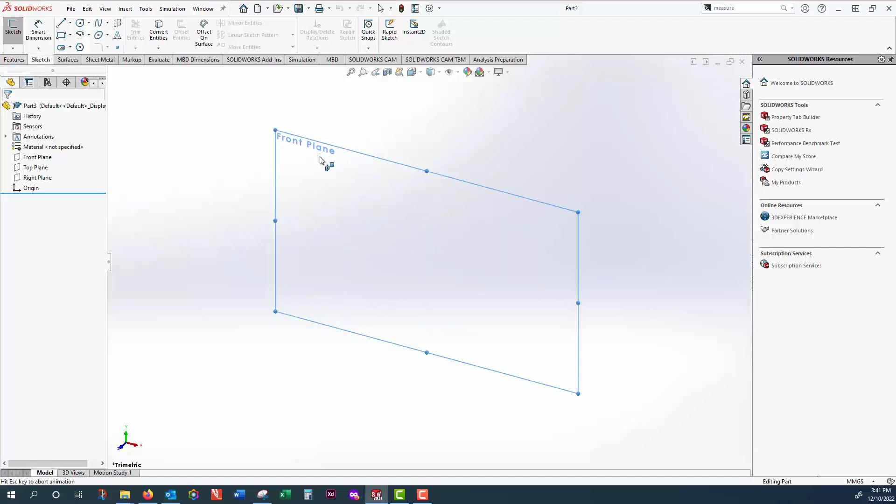In the last video, I showed you how you can utilize an image of a drawing. So we do the same technique here. That's very useful when you want to do reverse engineering. You have a picture which has dimensions on it, so we do a sketch first. From the sketch tools menu, you find the sketch picture option, and what you need is a JPEG or bitmap of the picture you want to use for measurements.

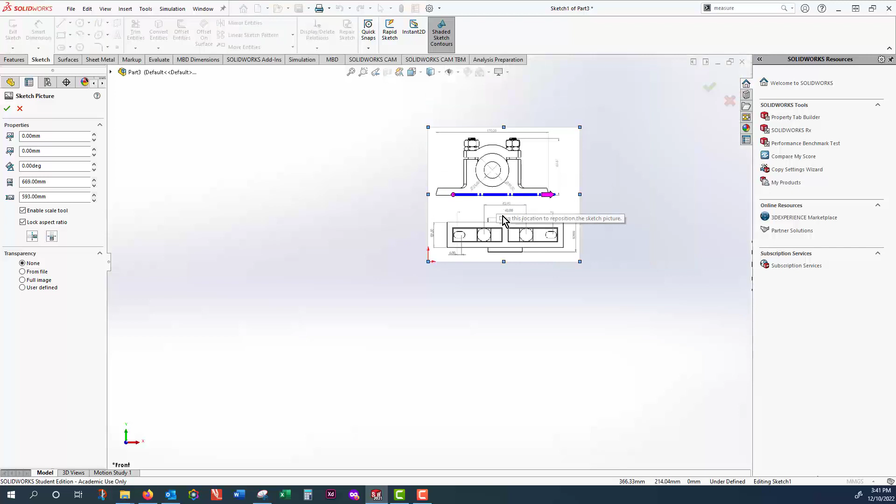In this case, we have the calibration arrow. You have to bring the beginning at the beginning of the largest dimension. The reason I said largest dimension is to minimize the error. Basically, you can do this with any dimension. So here, that is 170. Now my picture is calibrated, and from this point forward I can do direct measuring from this picture. Of course, it has some errors in it.

So let's remind ourselves how this shape looks. It is an upper block. It has a cylindrical face inside. Both outer sides are flat, and then these ears have the cylindrical faces, and there is a cutout to allow the bolts to sit there properly. Let's also remember there is a hole which helps to oil the bearing.

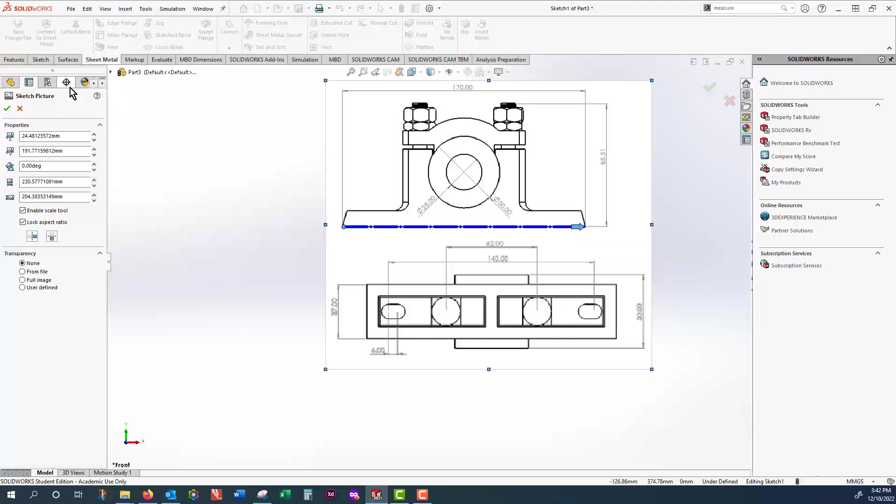So we remember all these features, and the strategy I'm going to use for drawing is to draw over this. To start that, let's finish the sketch tool, and then I need a center line, and the center line could be here — that is the axis of symmetry. Of course, I make only half of the part, and the rest is mirrored. So from this center I draw a circle.

That is pretty much it, and now I remember that the cylindrical part of the journal bearing had a diameter of 62 millimeters. So here I need a circle of 31, half of that diameter. That is the cylindrical part of the upper. And then let's remember that this one comes down with the two flat faces.

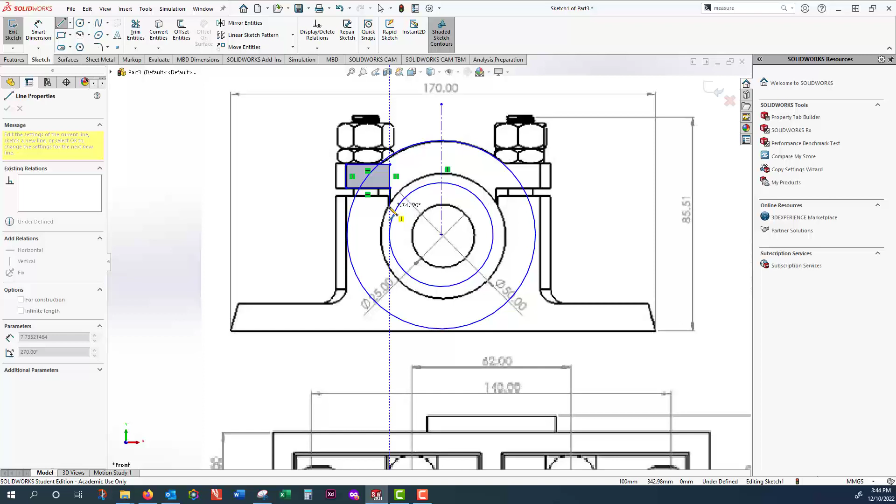Okay, so that means I need to make a rectangle from here to there. And then a little line to bring this up to, I think, up to somewhere like that, where it intersects the step inside.

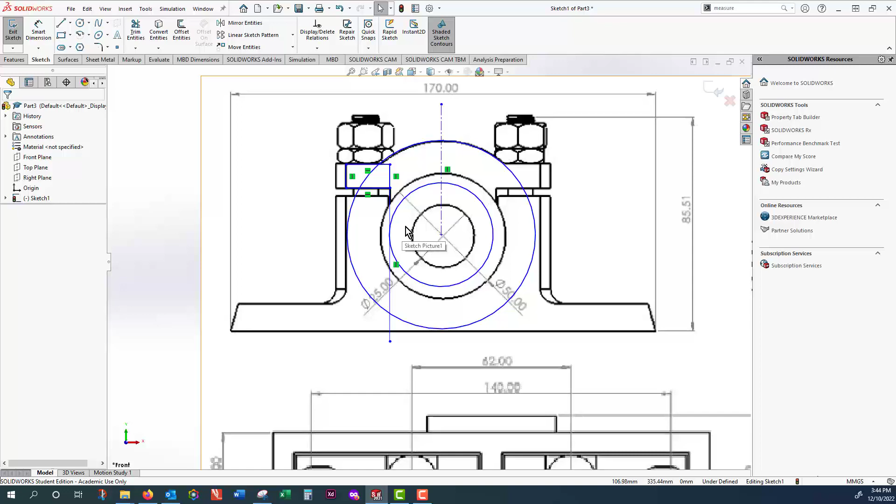So it has to cut this circle, right? Let me just make this one vertical, and then we see where it intersects. Now let's zoom in, and with the trimming tool we cut this at the first intersection.

And like I said, you don't need the right hand half because this is going to be mirrored. But this circle I cannot trim because it doesn't have a proper cutting edge — or does it? Maybe it does. This portion should go, and that has to go also.

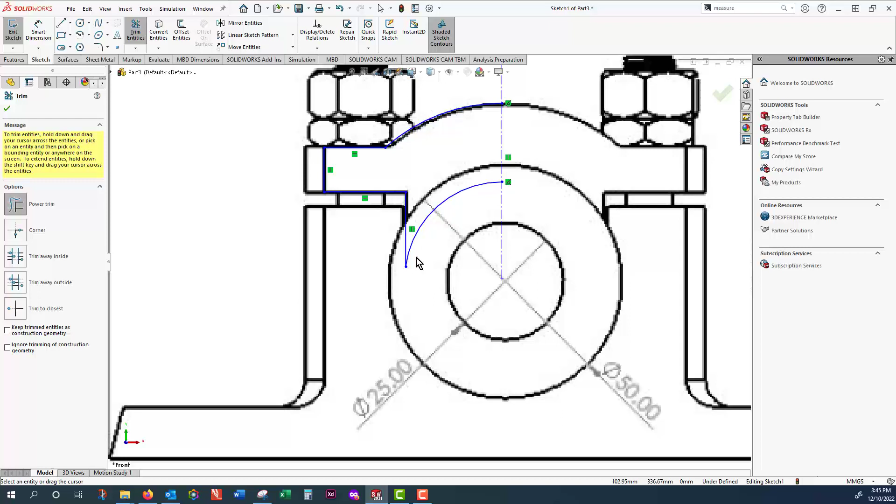It could be that this one has a thickness. So let's offset this one — or maybe I just have a look... yeah, that has a thickness, so there must be a flat part at this edge here. Maybe to create that, what we need is something like that, and then...

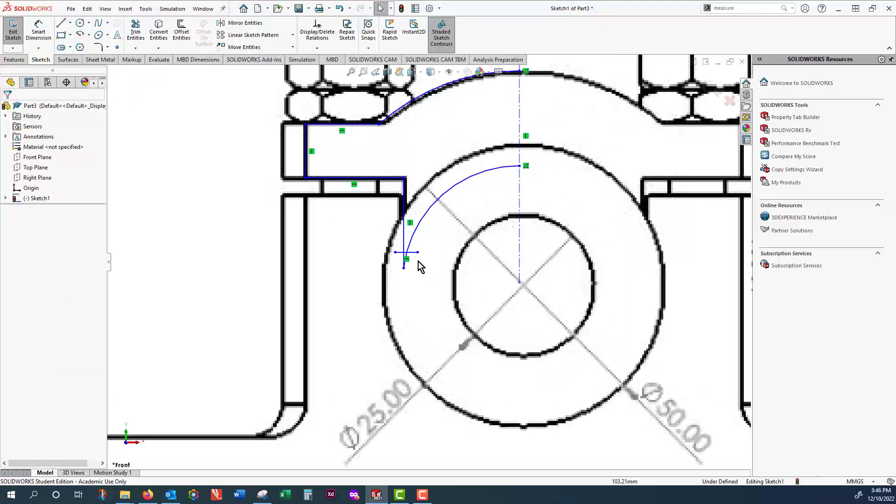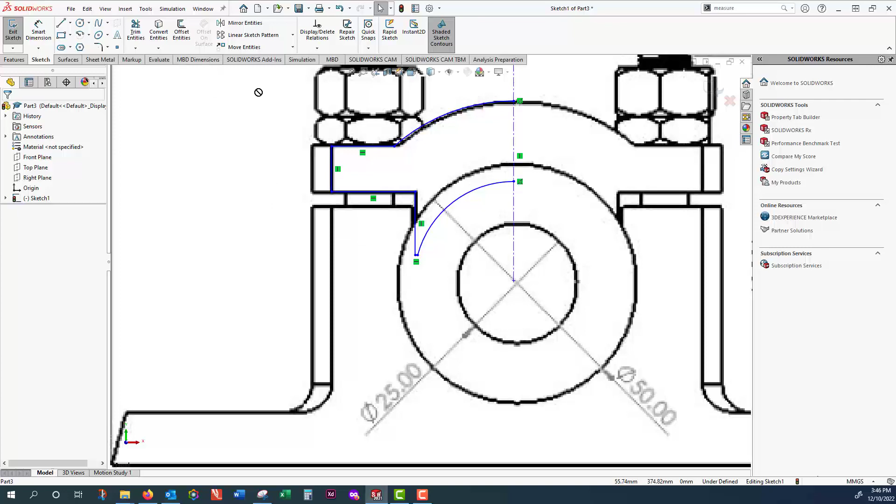All right, so it is ready to be mirrored. So how do we mirror? Select the component you want to mirror. These are the items to be mirrored, and then the mirror line is the symmetry line here.

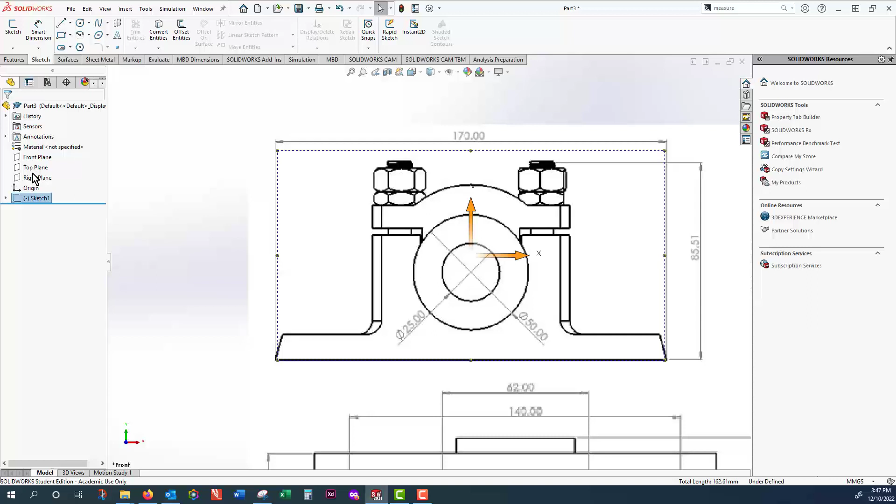All right, so if things are okay, that sketch can be used to extrude this. The extrusion is 37 millimeters. Let's extrude that for 37.

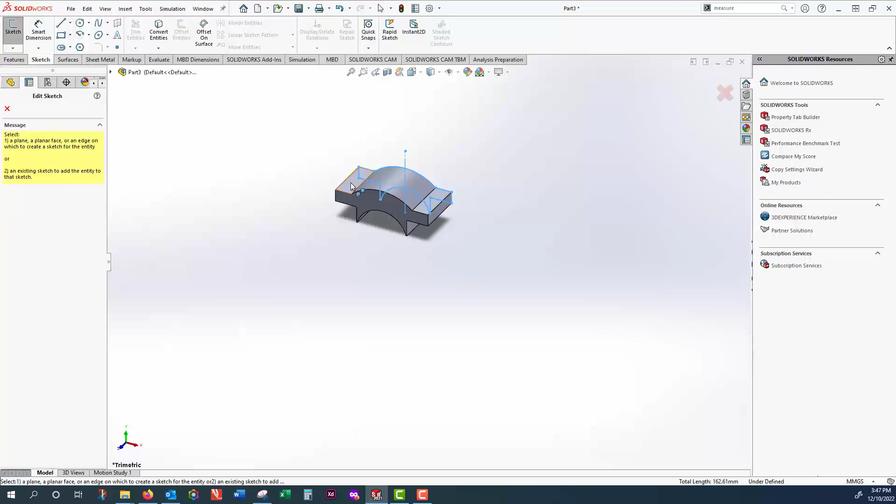And then we remember that these faces are cylindrical. How do I find that? How do I complete that? I make another sketch on top of this face. Here again I make a symmetry line from center to center, and then from the middle of this center line I make an arc. The arc passing here is 43, very similar to the one we estimated from the lower cap.

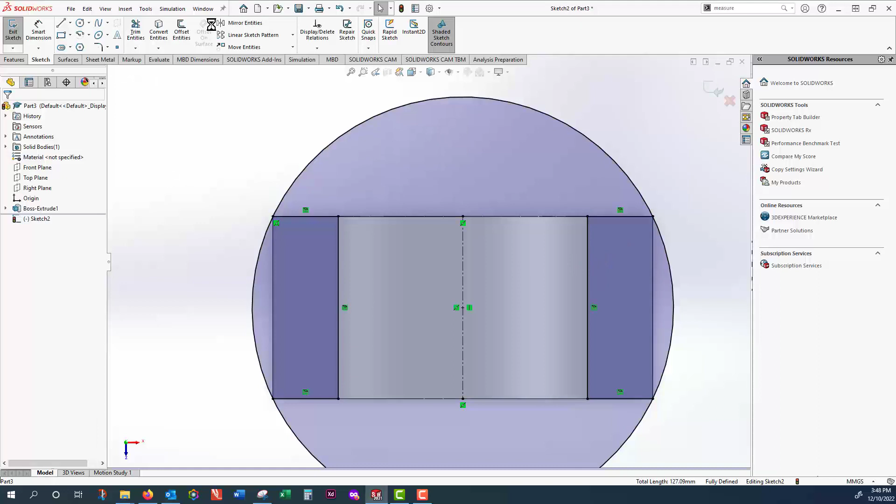And then convert entities — convert this one, that one, this one, and this one, that one, and this one. So now, to add the cylindrical faces, the sketch has to be... yep, I think the sketch is now ready for modifying the shape. So that is the sketch I have. Finish the sketch and have this one as extrude.

So reverse the direction, flip it, and then it's not a blind extrusion, it's up to the surface. We want that extended up to here.

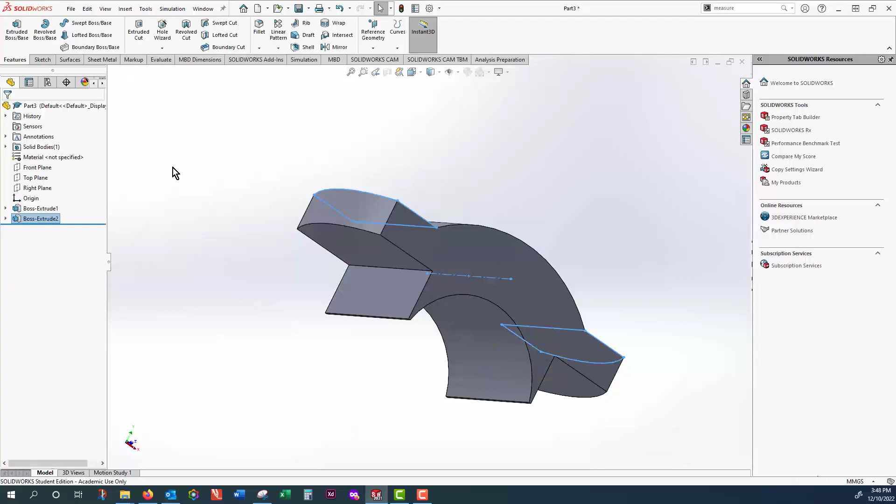Okay, does anyone remember the distance between the holes? The distance between the holes is 62. I'll make a new sketch on this face.

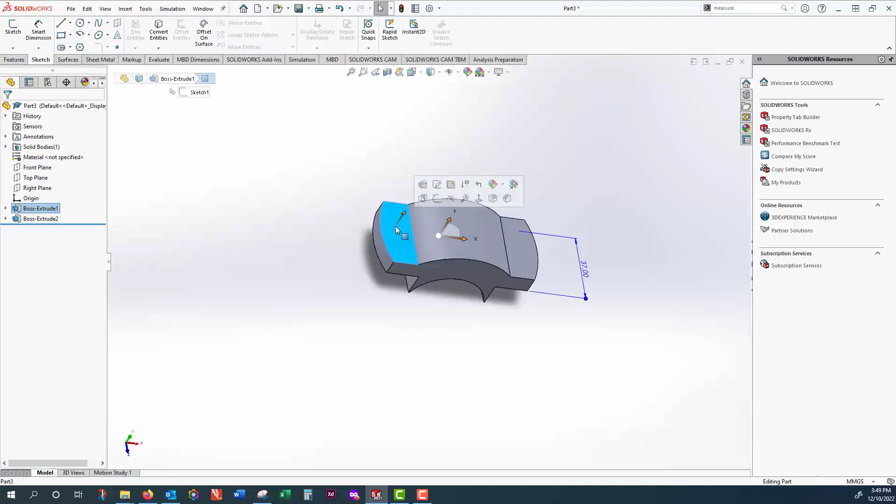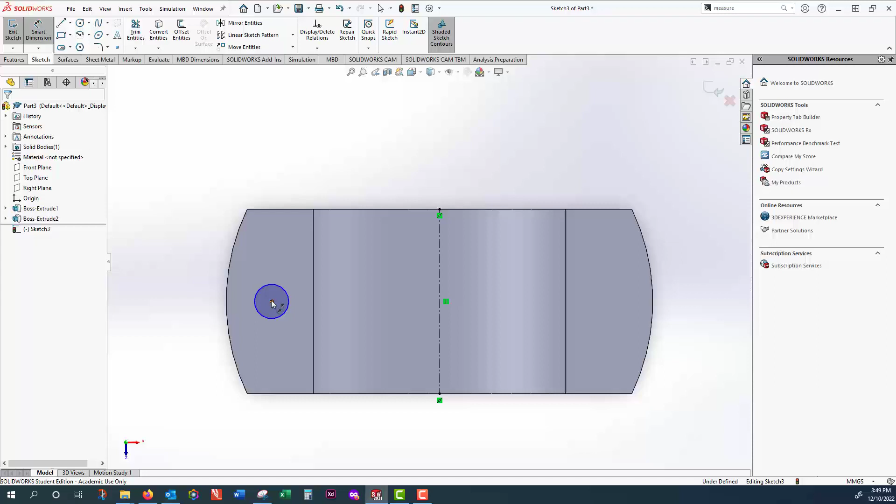Let's make a line of symmetry, and if I create a free-hand line here, the distance between here and there is 62 divided by 2, which is 31.

The diameter of this one is 10. So with smart dimension, that has to be 10 to comply with the lower one. Now you can mirror this circle about that line of symmetry.

One more thing - we remember that on the instruction page there are two modifications to that face to let the bolts sit in there correctly. So I can only make a guess.

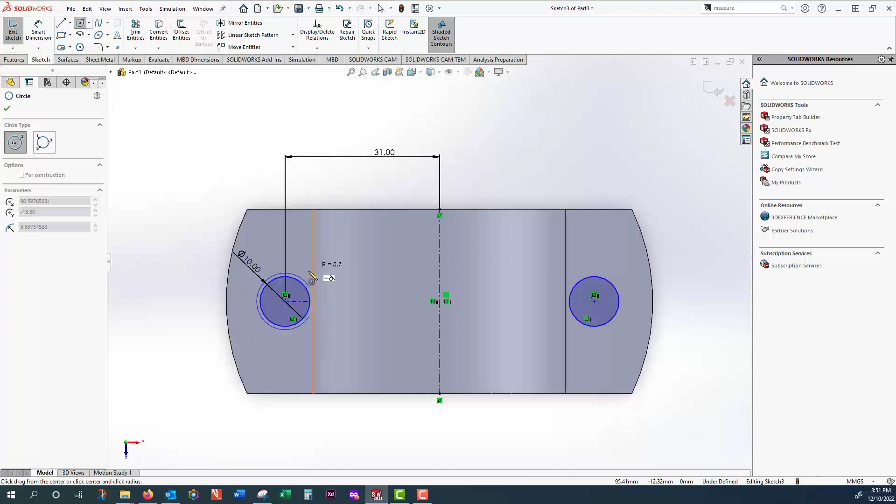This is something like... yeah, over here I need to make another circle concentric with that. I think that is good.

So make that 12. And this circle to be mirrored about that one - no, that is not the mirror item, the mirror line is here.

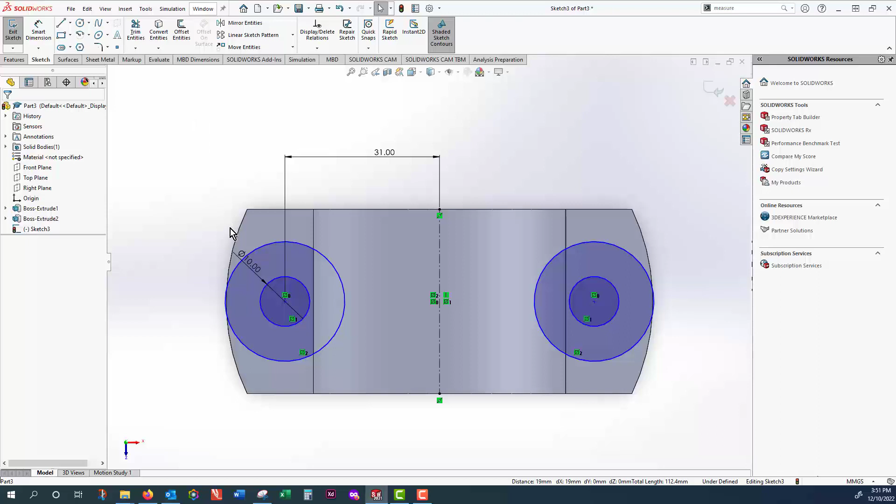Okay, so how do we use this sketch? That is how I do it.

From this sketch I go to the feature, cut extrude, and then in order to make this go both ways, I choose the mid plane. So I make this one a mid plane, and then, yeah, one way is cutting the drill.

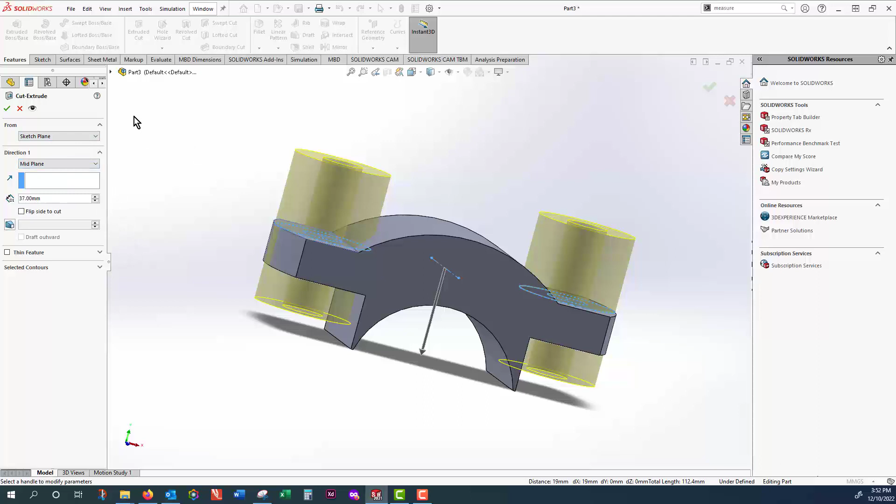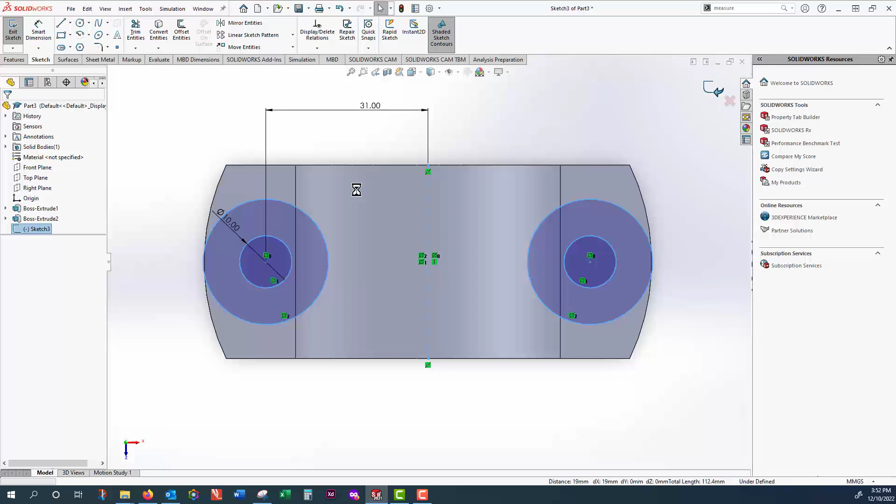Well, let's just do a different way. I keep this sketch as a reference, and then make another sketch on this plane, and here in this new sketch - I make a new sketch on this plane, and then convert entities, this one.

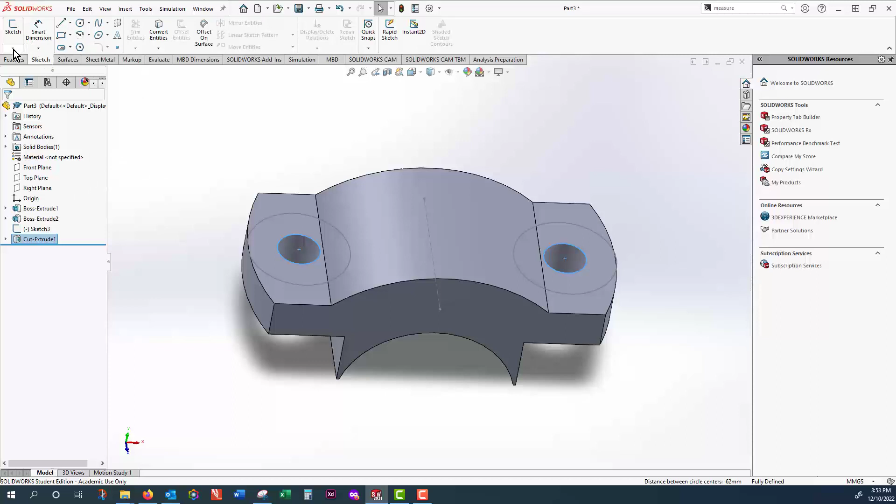And with this sketch we do a through hole. Now we make a second sketch that starts on the same plane, but this time we convert entities from this circle and this circle. This time the cut extrude is in the opposite direction.

So I have to flip the direction of the extrude. Yep, okay, that does the job.

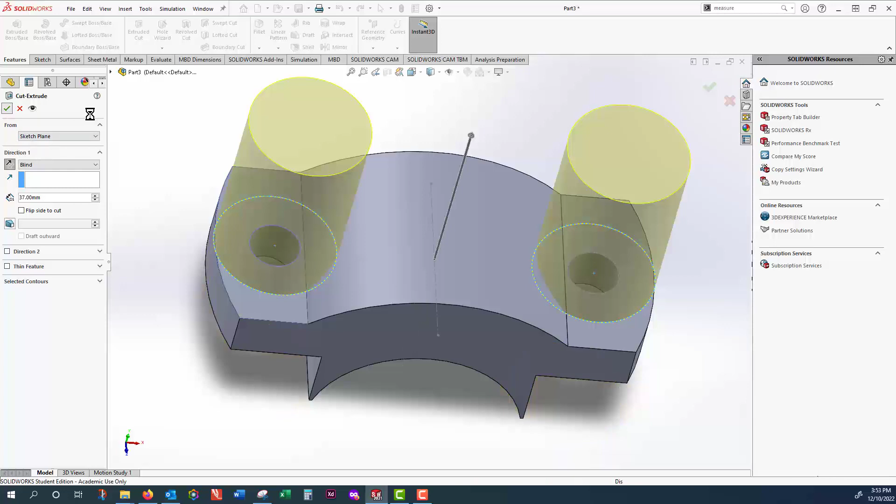I think the last thing we need is to drill a hole here for letting the oil reach into the journal, and that's pretty simple. Just make a sketch on this plane.

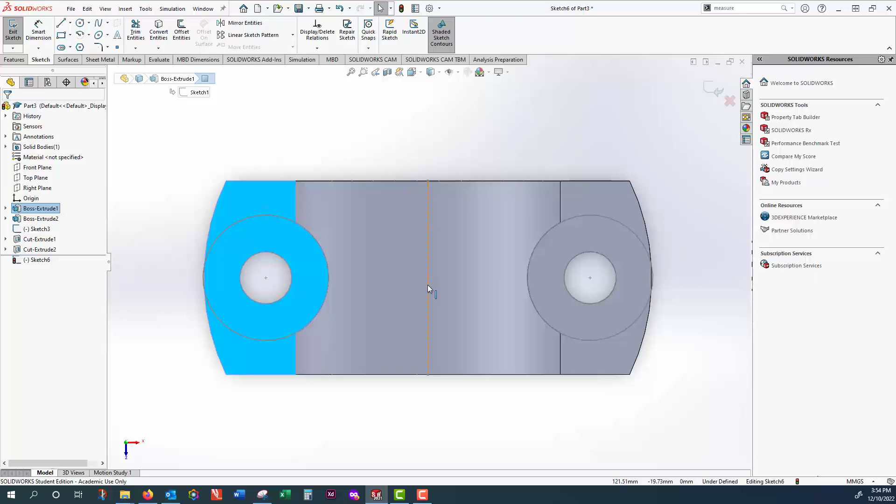At the middle of this center line, let me extract - convert entities, this one - and this is a normal line, is it? Yeah, if that's a line we have to change this to... yeah, now I think that's...

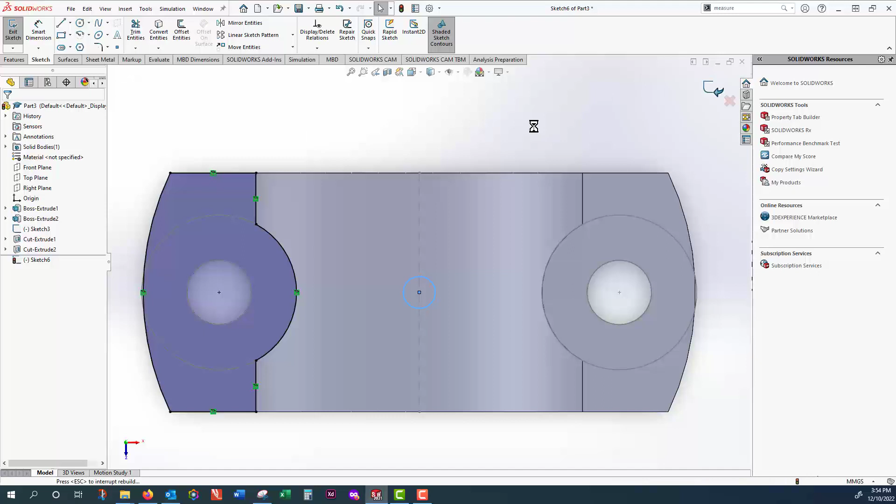You do a circle, radius of 2.5, for the oiling nip, and yep, that sketch now can be extruded cut through.

Oops, no, in the opposite direction. Not this one.

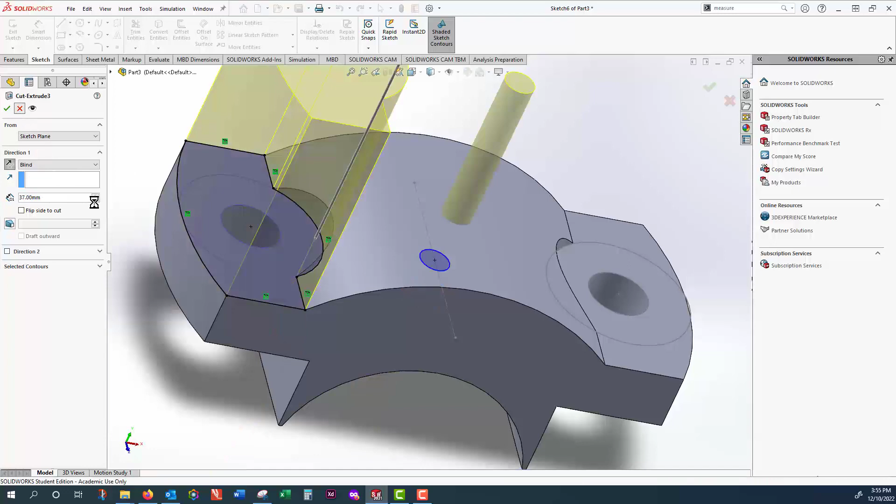So the last sketch, oh, the last sketch has some leftover. This shouldn't be included, so let's modify it. In this last sketch you don't need that part. Okay, now finish.

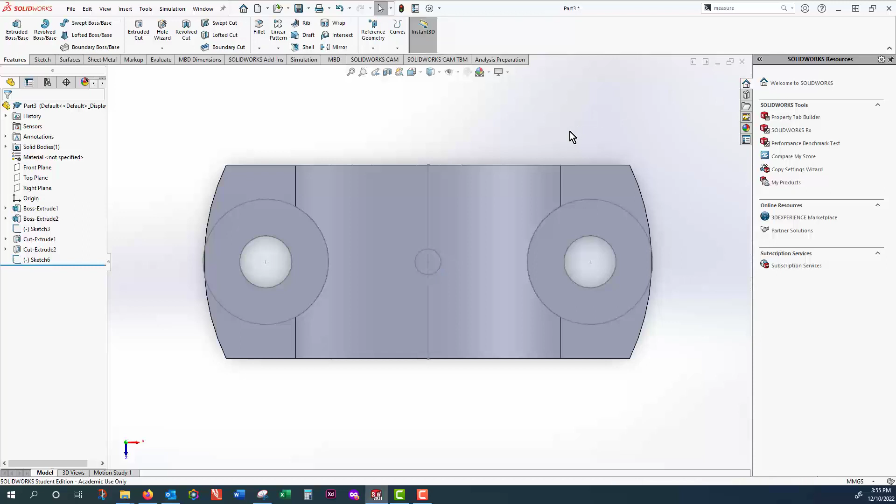And that sketch to be extruded cut, flip the direction, and to make that through...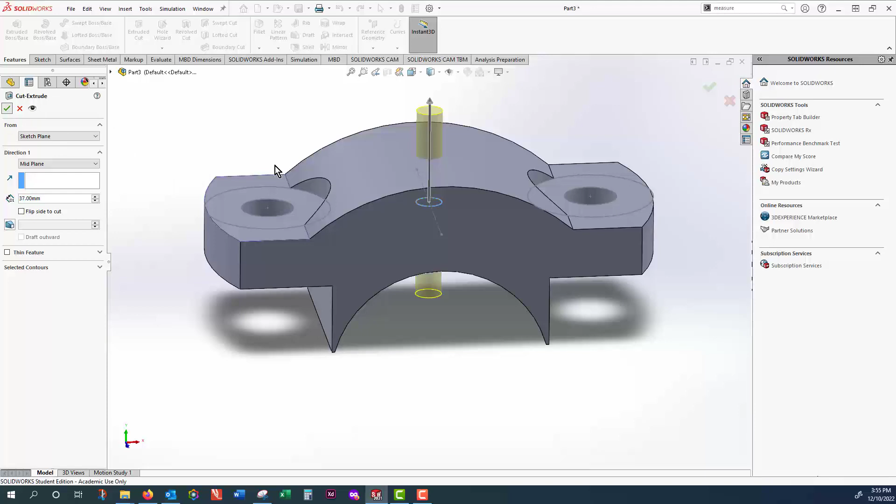Well, I can have this one through the mid plane, and now that's better. It means we make the hole on both sides.

Okay, so this seems to be complete at this stage. I save that as the upper block, and with this upper block I have all the main components.

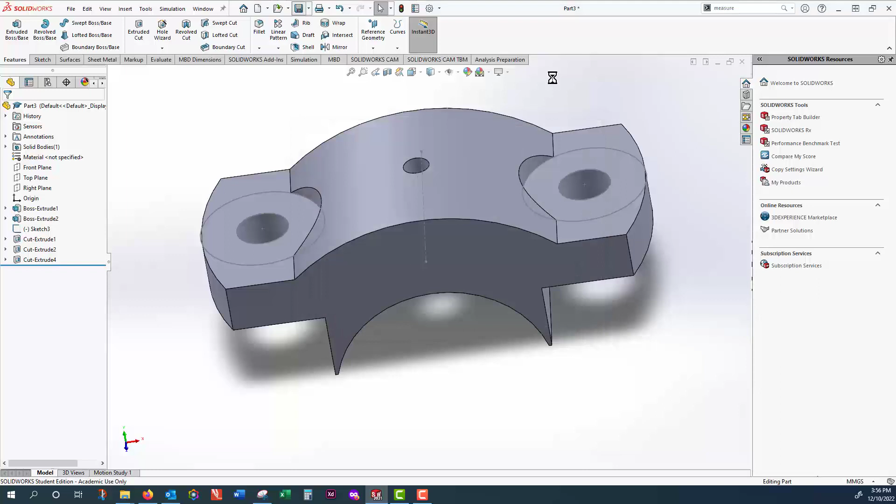So at this stage, let's make a new assembly. This is a blank assembly file, so we bring the 3 parts in one by one.

So in this new assembly, the first part which I'm going to bring in is the bearing itself. So we place the bearing here, and then you bring...

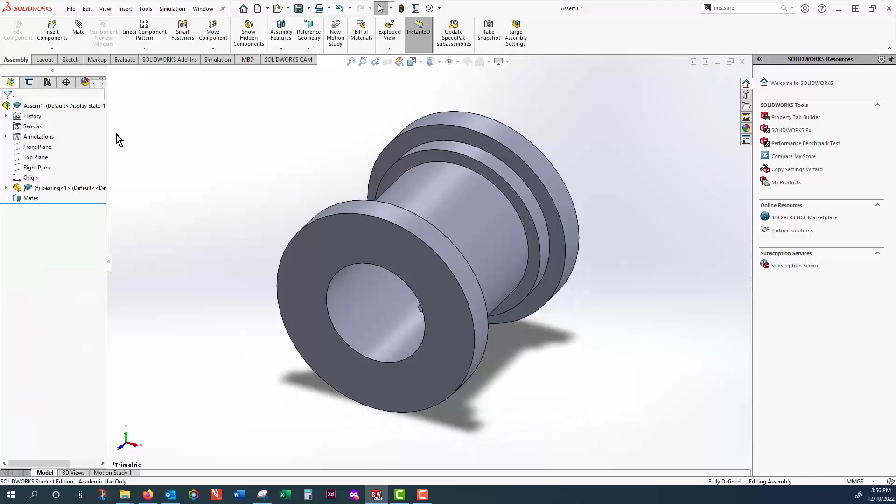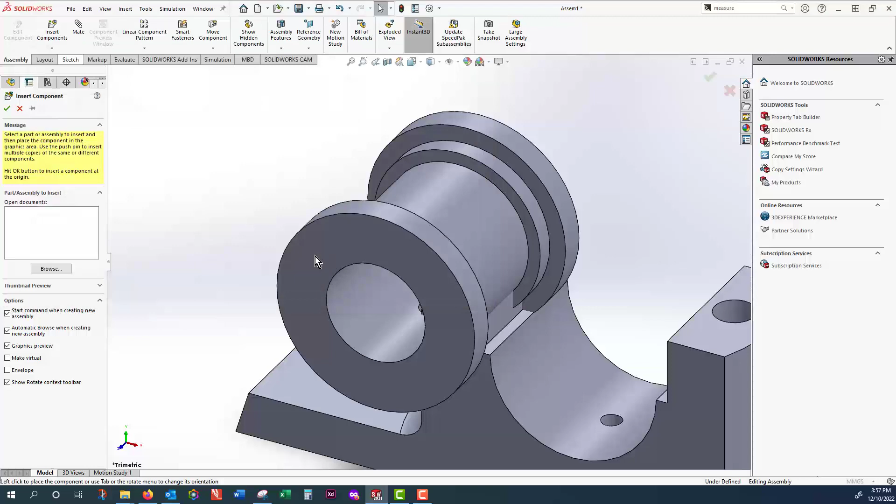the lower block, place it somewhere, and then bring the upper block, place it here, and now we want to define the relationship.

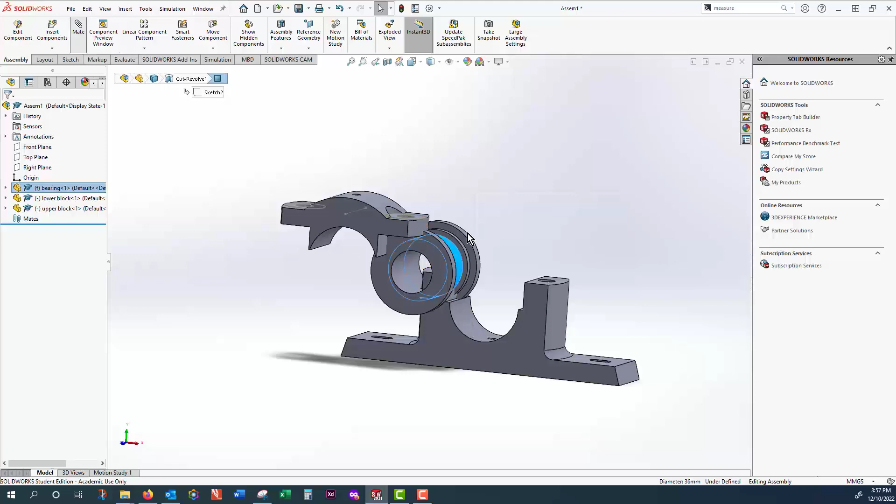So let's see which one is fixed, which one is floating - this one is fixed, this one is floating, this one is floating. So first thing is to make that cylindrical face mate with this cylindrical face - not this one, sorry, this face mates with that one.

And also - this face to be mated with that face - approve.

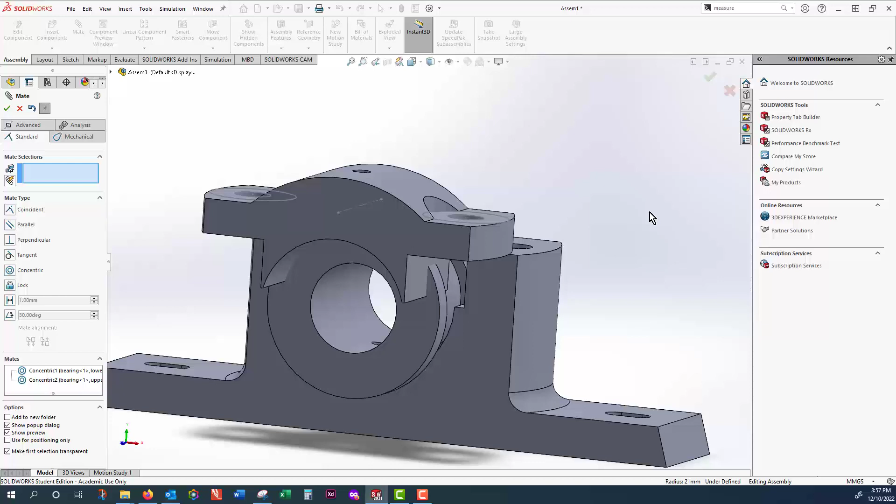And the next thing is, this is an advanced mate we haven't used before. This is related to the width, so I'm going to make the width of this one and that one align with the width of this one and that one, so that brings it right into position.

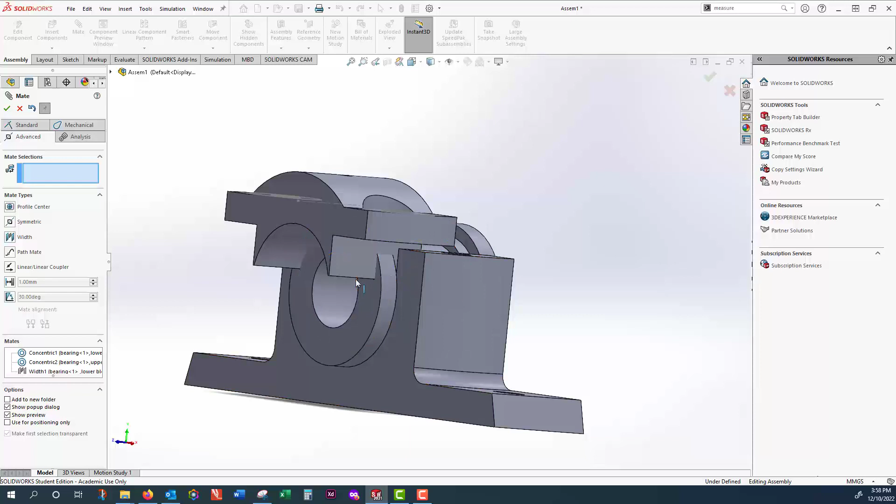We do the same thing for the width of this face and that face, with the width of this face and that face, so that brings it here.

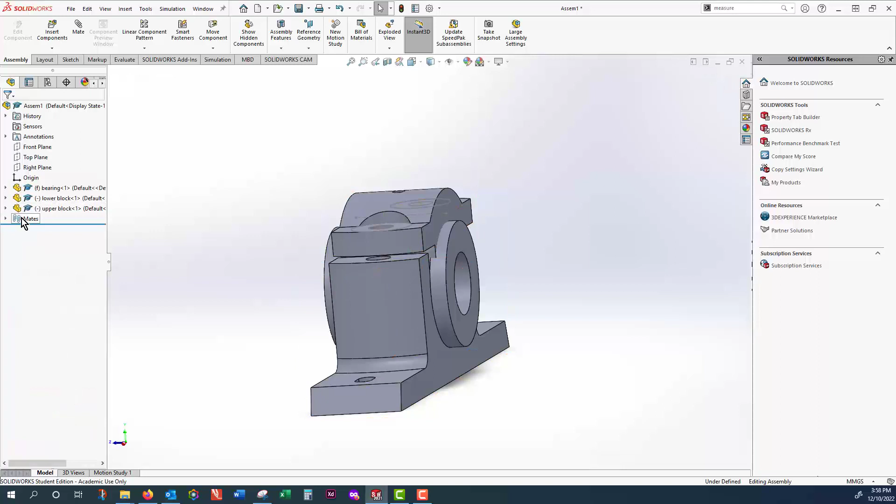So now that is - oops, I think the last mate was not quite satisfactory. I can have this one modified - edit. So when we edit, that's this face belonging to... let's do it again.

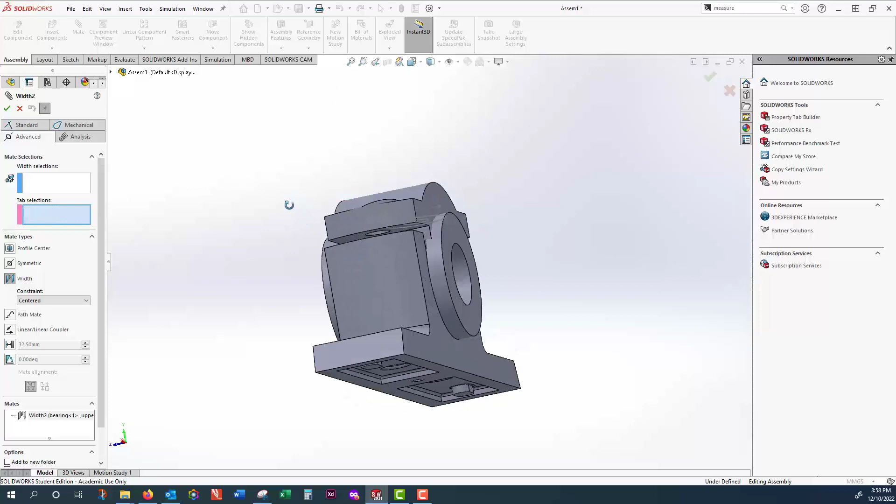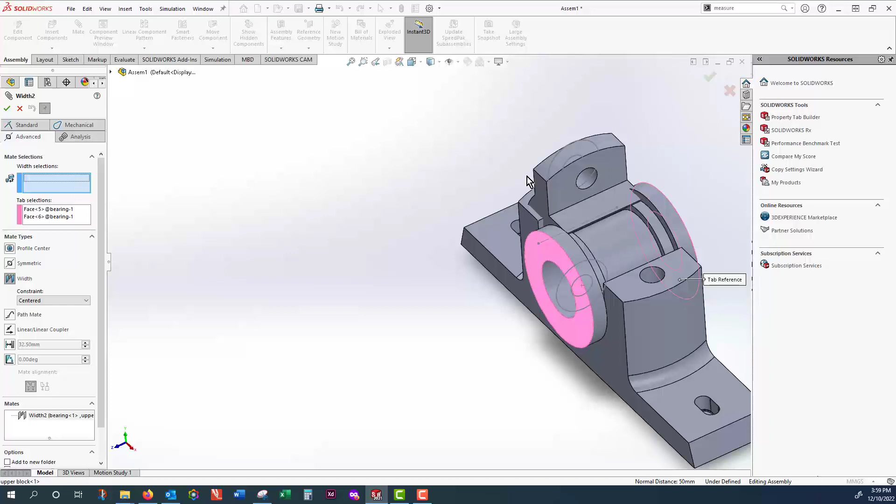So in the second run we wanted to bring this one in, yep, it's better now. So I make the width of this and that align with the width of this, and that.

And now rotationally, what you could do is make that one and this one parallel. Go to the standard mate, make them parallel.

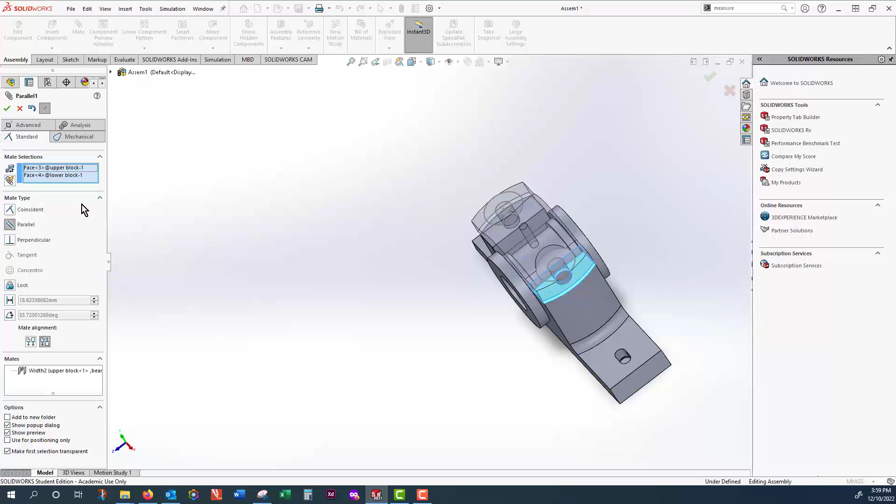So the next step is to plug in the bolts and nuts. We go to the library, then from the toolbox go to add-in the toolbox, and I'm choosing that from the ANSI metric bolts. Let's grab something like, let's see what we have, not self-tapping, machine screw, the countersink, not this one.

Hex head, yeah, I think that is not bad. So I'm grabbing this one, so when I grab this in, I think I have to exit the mate first. Yeah, alright. So now from here I grab this one and bring that near to this cylindrical hole, and magically it detects the diameter.

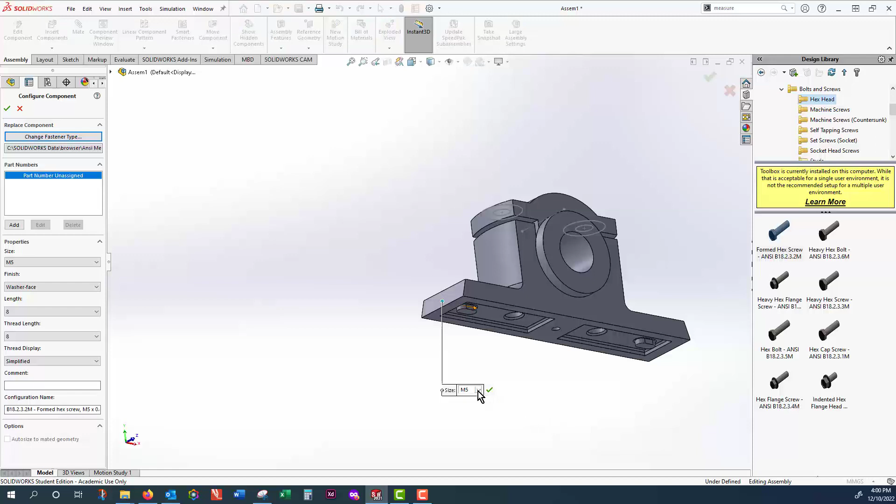So that is M5, I think. And what about the total length? The total length, just from here, the total length is 85.

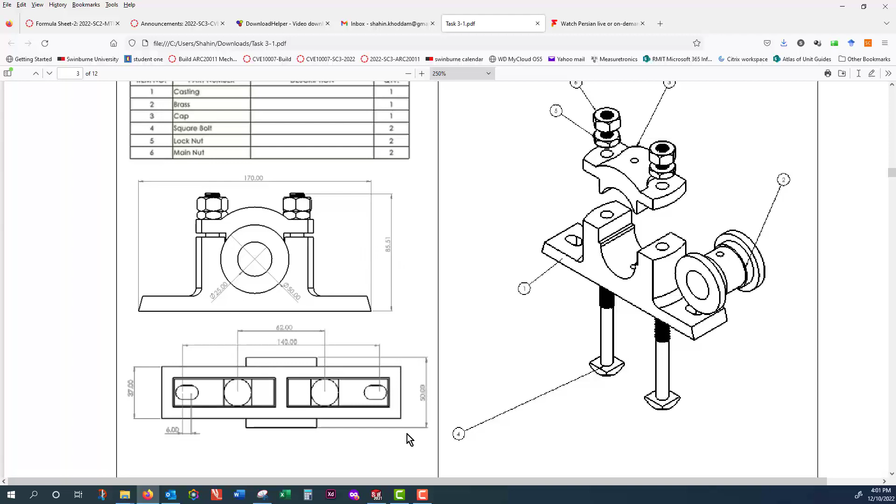So make the total length, yeah, 90. There's no 85. 90 is good. Okay, and right, so the second one I put it here and then press escape.

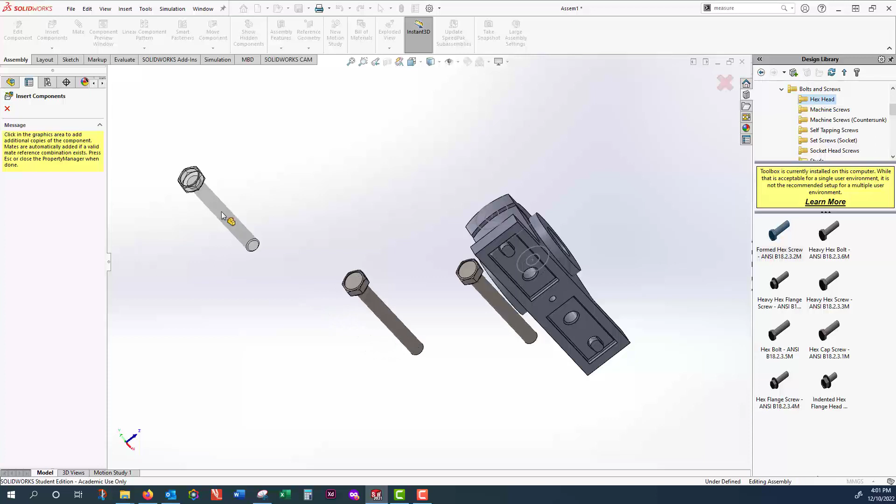So this bolt, you can make this cylindrical face mate with that cylindrical face. Approve.

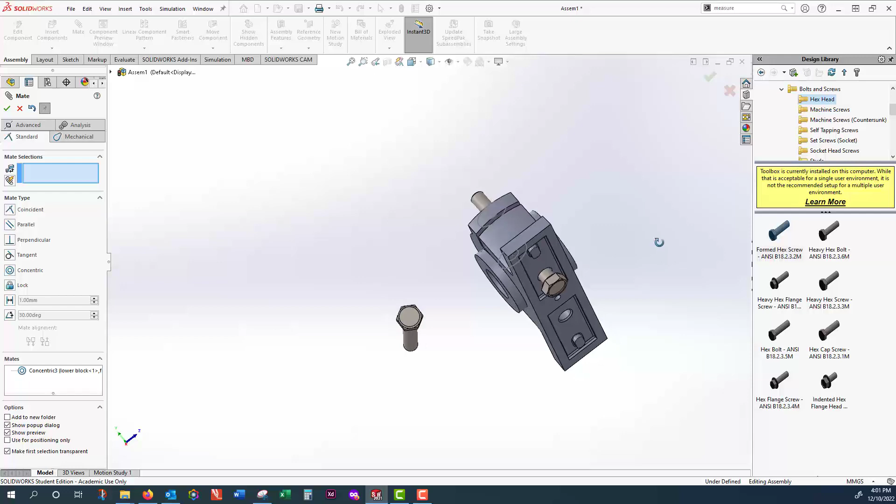And then you want this edge to be coincide with this edge. Well, they are concentric, but let's do that again.

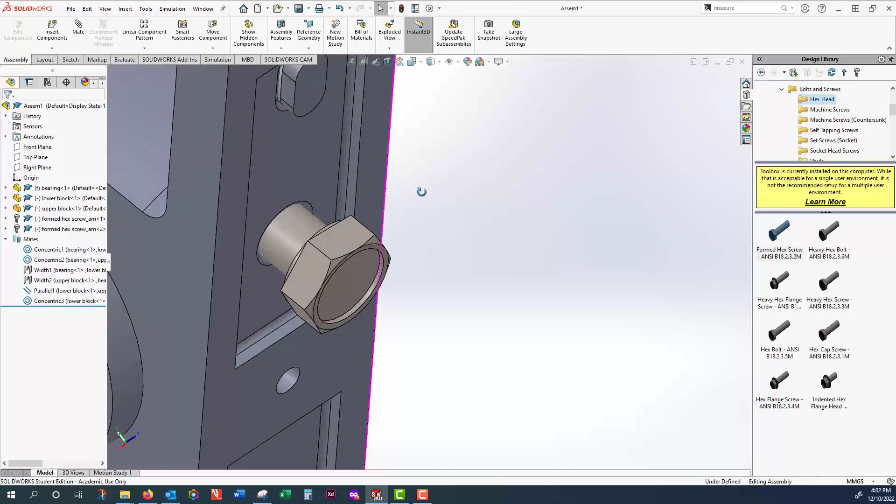You want this face to coincide with that face here. Oops, didn't go through. Why not? Let's do that again. You want this face,

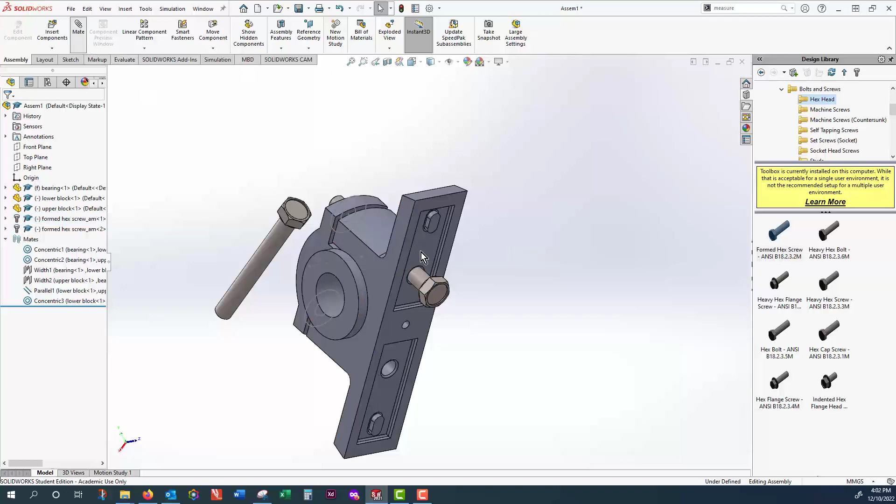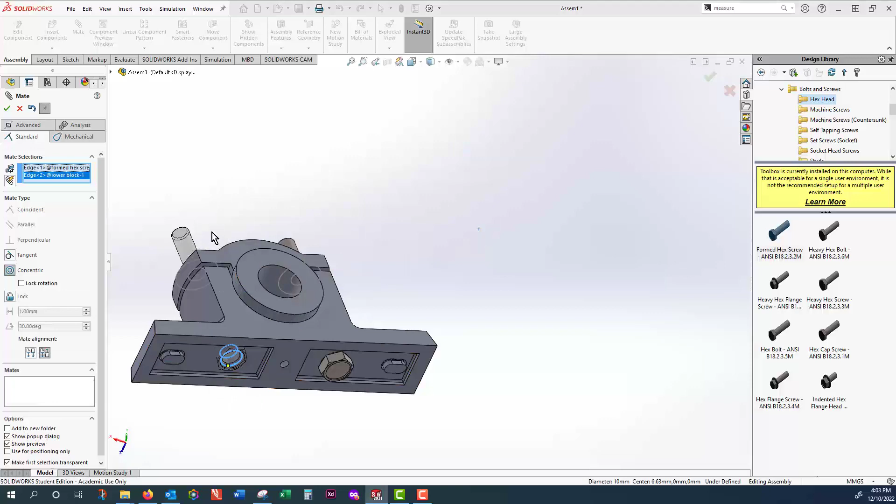and also you want this edge with this edge to be concentric, and then making this face and this face together.

And finally, to add the nuts, you go back to nuts, and from here you grab these nuts to this bolt. I think you have to exit the mate first before doing that. So I grab these nuts and drop it over this one. Okay, so that is M10 again.

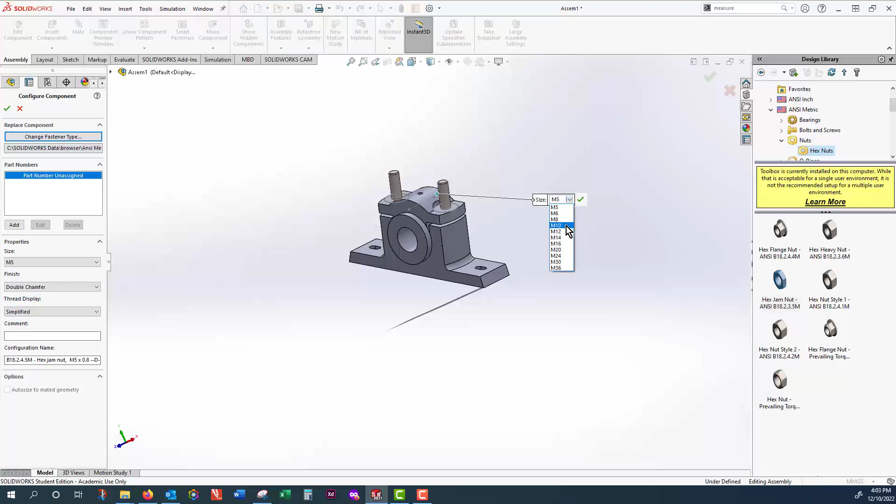So that is M10. Alright, and the second one you put it here and then press escape. So that this face mates with that face. Approve,

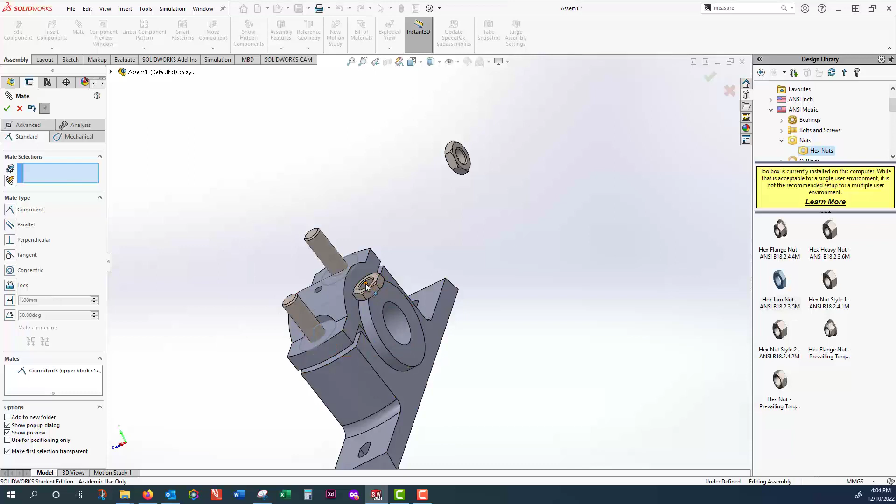and this cylindrical with that cylindrical. Approve, and you do the same thing here. This face, approve, this face, that face, approve. And finally you want to add two more larger nuts here.

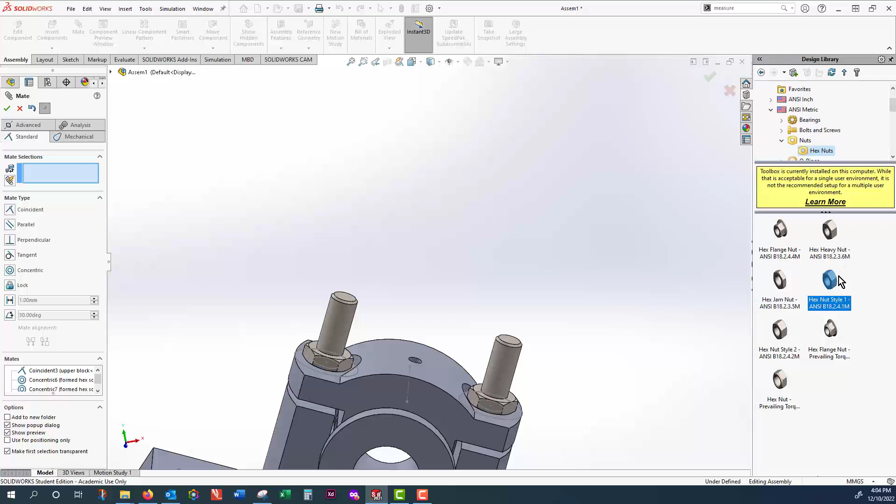I drag that one, so I have to exit the mate first before bringing the part from the library. So I bring that one and try to, yeah, if I drop it here, it would detect the size, right? So this time it detected the size properly. M10, yeah.

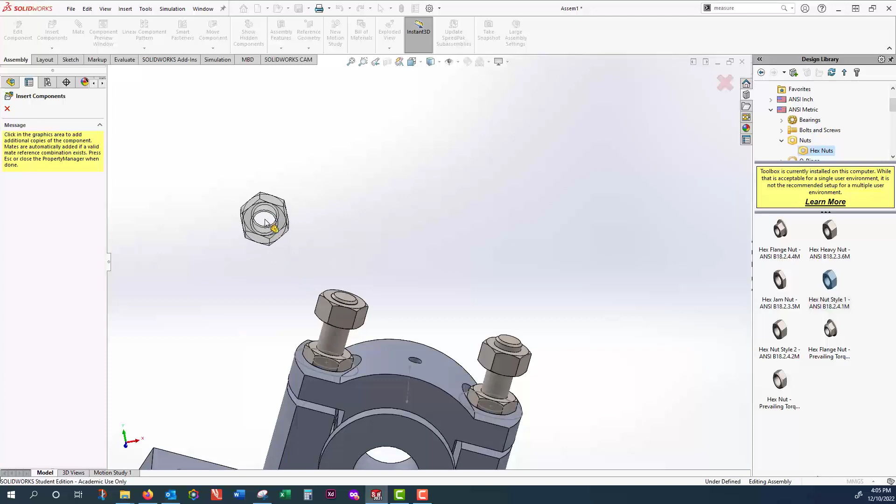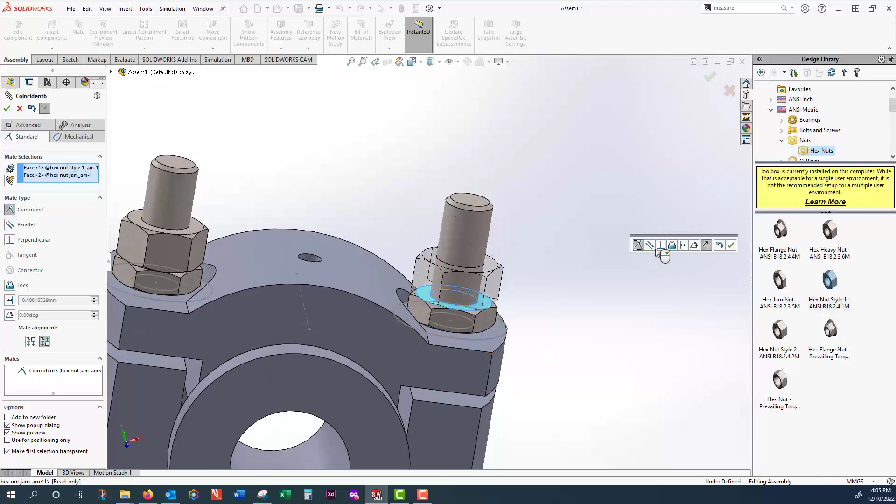So you approve, and it lets you bring the second one. The second one you apply it here and then press escape. And finally all you have to do is add a mate between this one and that one. Approve, this one and that one, approve. And finally, okay, now I got my full assembly.

How do I make a bill of material? That's the important part. So let's save this one. And then to make a bill of material, you either can do it in the 3D space, insert.

I don't think you can do it here. You have to make a drawing first. So to make a drawing, make drawing from assembly. If you want to make an exploded view, let's do the exploded view first.

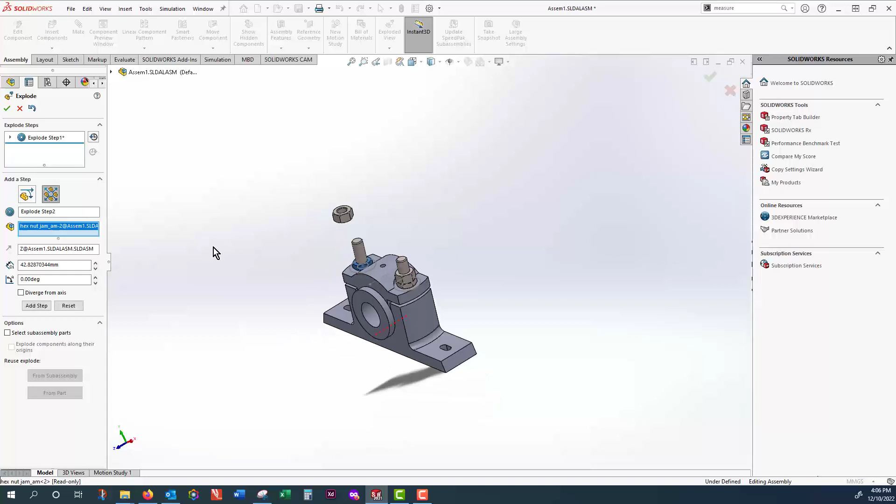So with the exploded view, I just would have an exploded view generated. Yeah, something is not right with my exploded view, is it? So exploded view, so that is like so.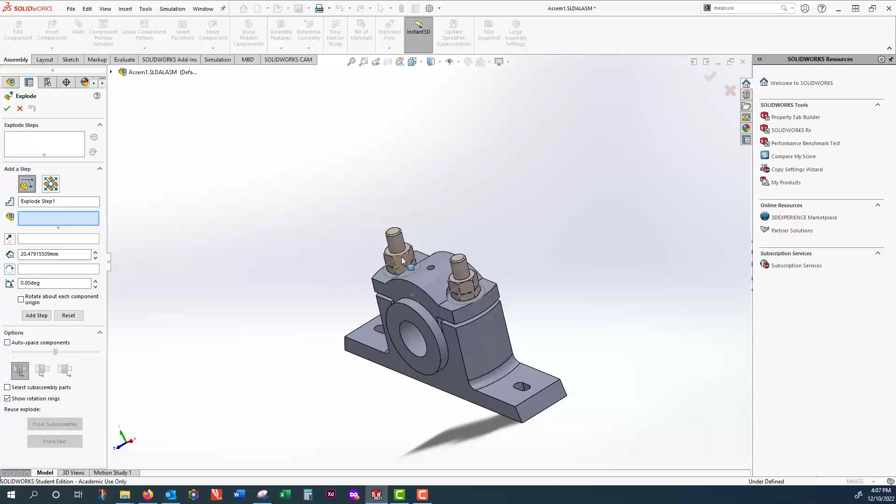Yeah, that is, the axes are not right. Okay, so I don't know why the axes are rotated. Maybe, yeah, make it, oops.

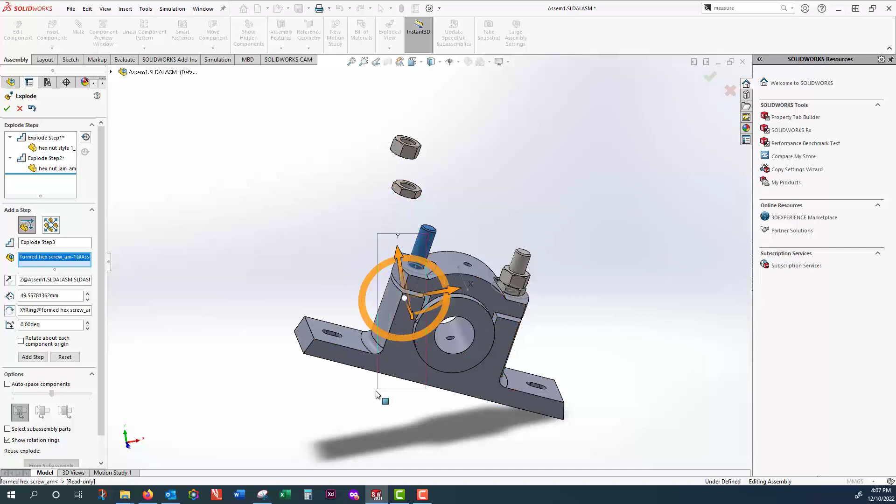Anyway, so I'm pulling this one out, done. This one, pulling that out, done. This one, bringing out, done,

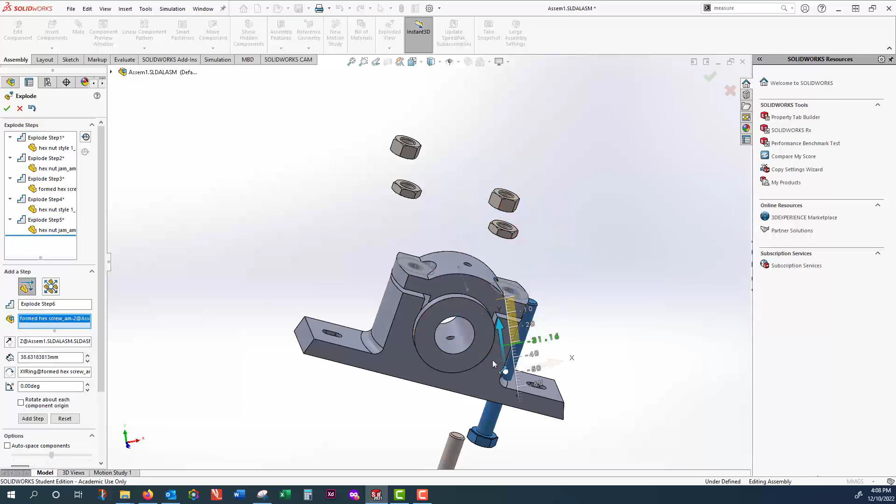done, done, done, and finally this one, we bring this out, done, okay. Now this exploded view is complete.

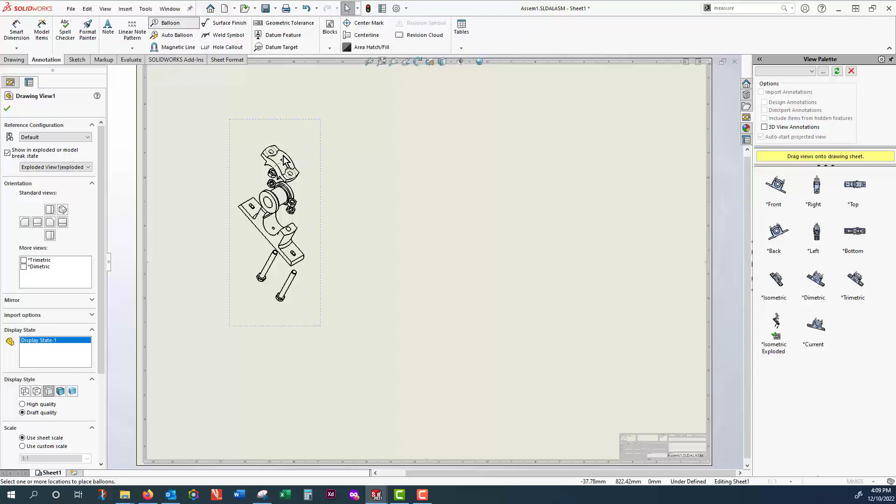So what I do from here, save this first, go to make drawing from assembly. Okay, now in this assembly I can drag the exploded view, put it here, and then go to the annotation, add balloon. This one, this is a balloon, balloon.

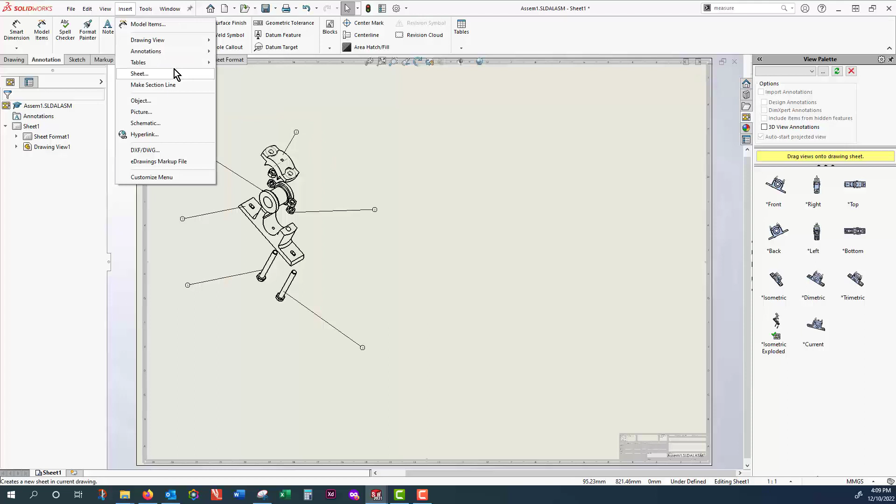All right. And the next thing, we want to insert a bill of material. Go to insert table, bill of material, and for this part, bill of material, this is the default. You can change the default if you wish, and then that is your bill of material. Of course you can modify the columns, add whatever you want to include in your bill of material.